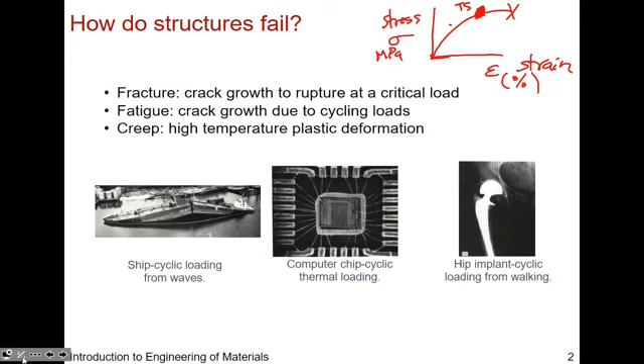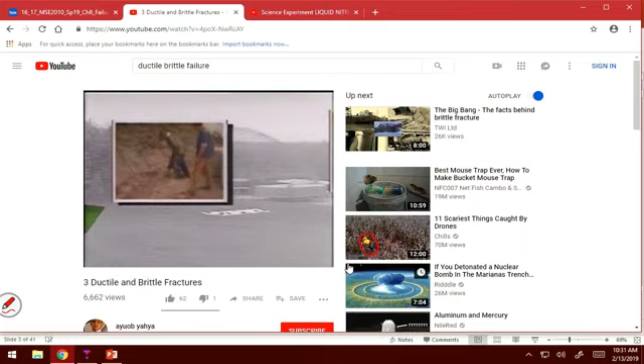There seems to be a synchronization issue with Box because my links are not showing up, but that's okay, they're quite retrievable. Before we go into ductile and brittle fracture, I'm going to post this onto your Carmen page under Chapter 8, Resources and Information. I just wanted to show you the mechanism from this very old, possibly late 80s, early 90s movie, but it gets the point across as to what's happening.

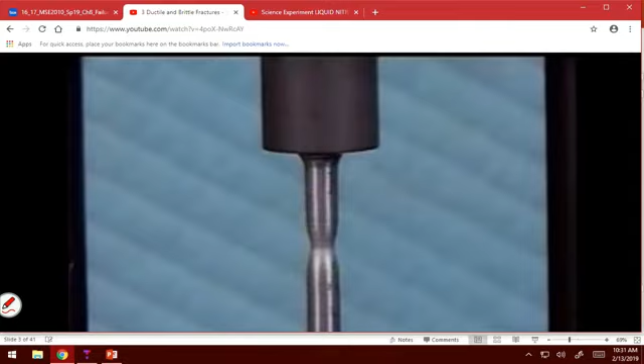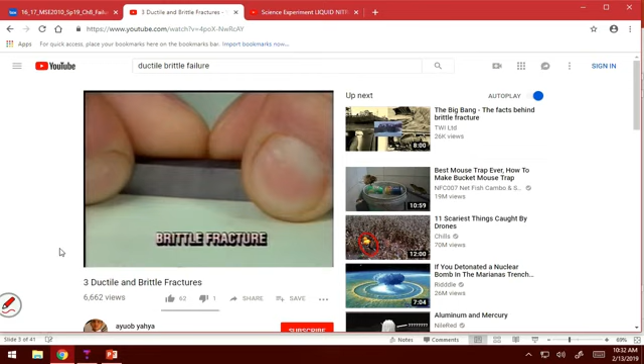So when materials fail in a ductile way or in a brittle way, you could see a load being applied in tension and it snaps. You see this typical cone shape, cup and cone type of breaking versus just cleavage and breaking. So here's brittle fracture, it just breaks off, right? There's no necking. You don't see the elongation and the narrowing of the area.

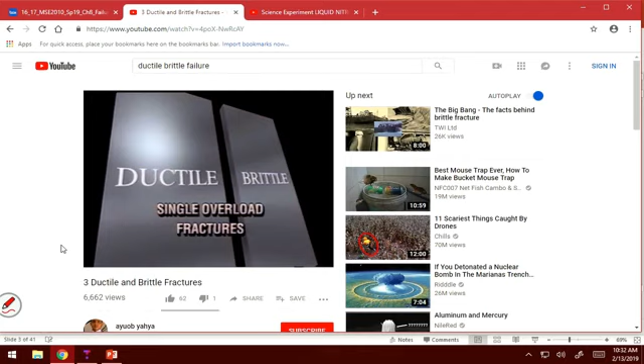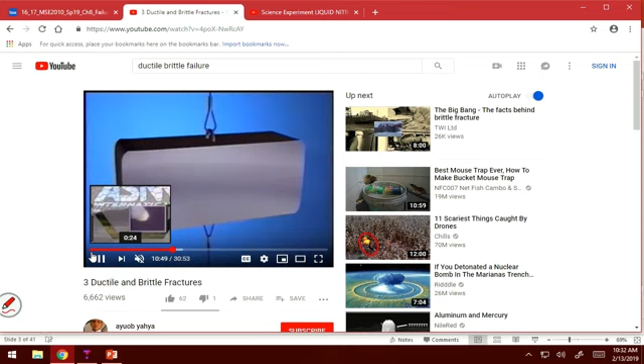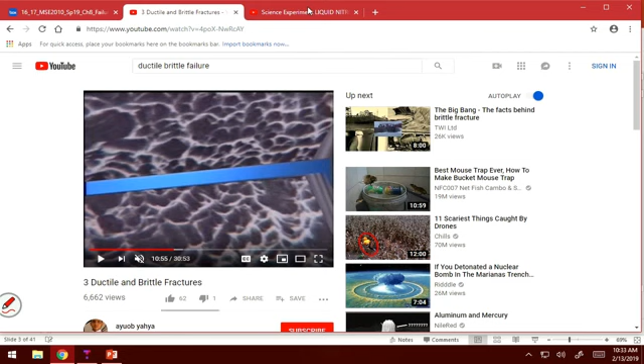You just see break. For fatigue, you can apply a load like this, and there are machines that do this for you: apply compressive and then tensile stress, and also rotate the bar. There are a lot of videos that show this, and this one is quite spectacular. They show micrographs of what happens when these things break, at what point and how. It's a very long video, so I'm going to skip to the point that's illustrative, where you can see these voids forming and then just breaking.

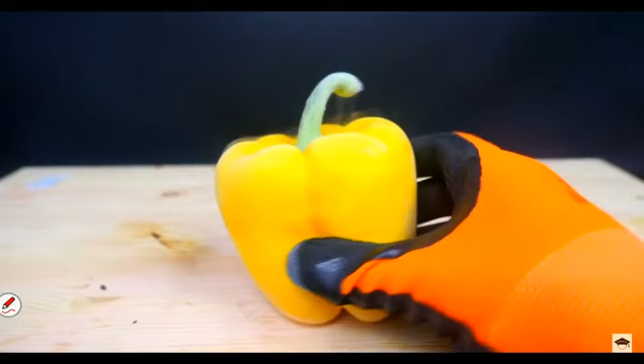Okay, so this is liquid nitrogen, very low temperature, negative 320 something Fahrenheit. Our cold days don't really compete with this. So what do you think is going to happen to this poor bell pepper? Let's treat it like a polymer, as if it was once fibrous, a thermoplastic fibrous polymer. Now it's been treated with liquid nitrogen. It's obviously very cold. What do you think is going to happen? It's going to shatter, brittle fracture.

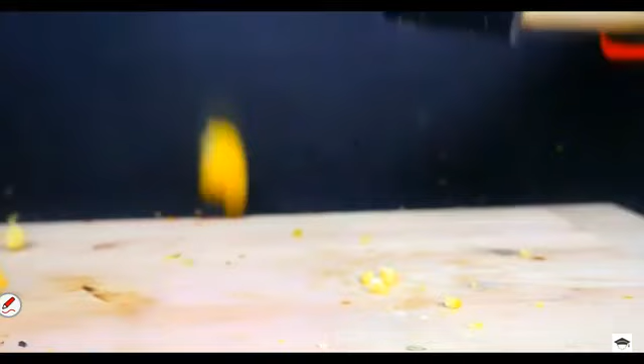Oh dear. It is exactly what you think it is. Okay, so that's how a polymer behaves. There's another example of polymers.

Okay, now let's go to a lock. If you ever forget the keys to your lock, this is one way of dealing with the situation. Some steel. Clearly it's a lock because you can put a key in it. Now it's soaked in liquid nitrogen.

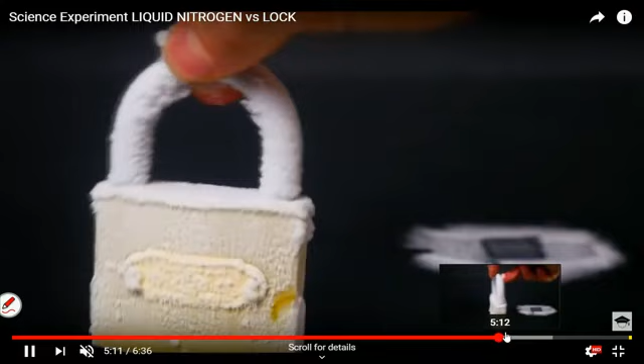What do you think is going to happen to this, now that you've decreased the temperature to something really low? It's brittle, the fracture is going to be... Oh, they did it to two locks. I've forgotten about this, well, it's true. Always gather statistics, right? You need to be able to repeat your experiment. You can see it's quite a small hammer.

Oh okay, so the piece didn't actually shatter that much, but I think it's also because, well yeah, you can see there's just complete cleavage, right? It is a clean break. There is no ductile breakage there. So you don't see any ductile breaking, which means no necking, no elongation and narrowing and then breaking, you just see the breaking. So it's a brittle break, a brittle fracture.

There's a lot of these types of fantastic videos online. Okay, so that's it. Now, if you look at the material after fracture happens, you can tell almost immediately how the material broke. One, as I mentioned, is cup and cone, due to necking. Brittle is just a clean break. You can also kind of see just by eye the shimmeriness of a brittle fracture versus a kind of dull surface for a ductile fracture.

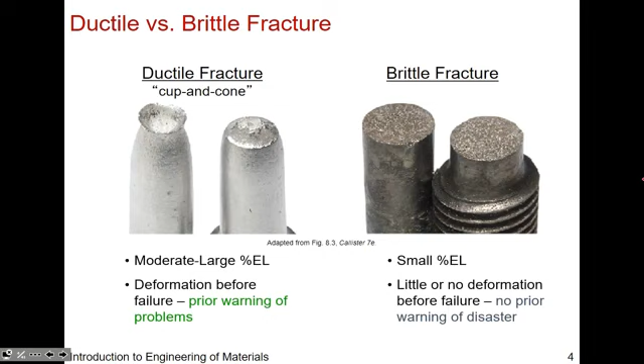As I said, there's some elongation, and if you notice elongation, if you have a monitor set up, or if you're servicing this material and bring it in to check on it, you can do X-ray microscopy, X-ray diffraction, and see there's some changes in the structure. You could probably just take this to an optical microscope, to be honest. You don't have to go down that far in resolution, but by examination you're going to see imminent failure. The problem with brittle fracture, of course, is that it happens very quickly, so you might not see this as you're inspecting a part.

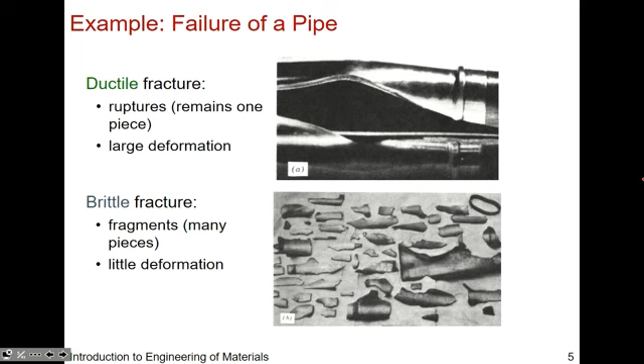So that's pretty dangerous when it comes to materials failure. Right, so we see here some more examples. Brittle fracture, it's in fragments, there's very little deformation, if any. Ductile, there's large deformation, you could see it coming. This is a good thing, it's better to catch a flaw before it ruptures, so there's some bit of warning there. There are also ways of testing materials.

If you just machine something, you want to see what kind of impact, what kind of toughness it has, the impact energy that it can absorb. You do these standard materials and mechanical engineering type tests called the Charpy impact test.

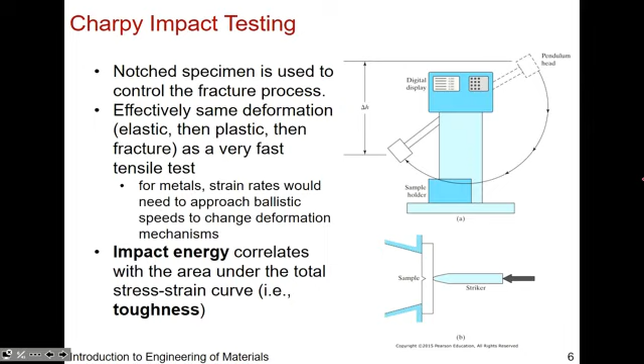You lift the weight and then drop it, and based on the MGH difference, the height and difference of how much this pendulum swings, you can back calculate how much energy has been absorbed. So you could talk about a material's toughness that way as well. As you recall, toughness is the area under your stress strain curve.

Professor Glenn Dane, who does this a lot, will come in and talk about these fun types of experiments on failure.

You can manipulate the stress strain curve of a material, or its mechanical properties, by either heat treating or alloying. We've already seen from the YouTube video what happens to metal when you drop the temperature: it goes through brittle fracture.

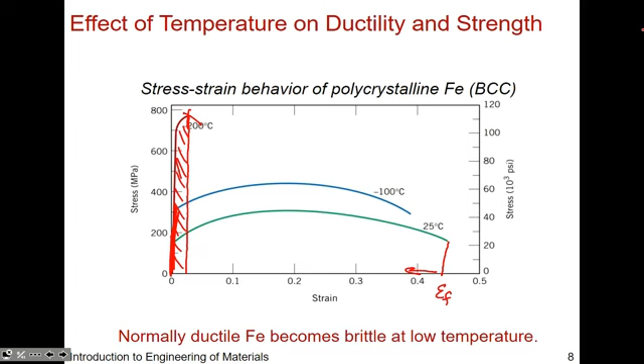We left off on this plot. So how do I improve the ductile to brittle transition temperature? What you want is to be operating above the transition, because you want your material to be ductile so that if there's going to be a rupture, you have some warning, some time.

You can add in, let's say, substitutional components. Here, for this particular steel, if you add in substitutional manganese, you can decrease the ductile to brittle transition temperature as you go from 0 to 0.5% to 1% to 2% manganese. Now your material is safe to operate at, I'd say, negative 25 C and above.

Now, safe is a highly nuanced term. If I'm just looking at this transition, it's the predictor: is it above or below this ductile brittle transition? Above, it's going to be ductile. Below, it's going to be brittle.

You can see that here: the impact energy is quite low below this transition temperature, where it's quite high above. It can absorb a lot of energy above this transition, so it can plastically deform and give you some sort of warning before rupture.

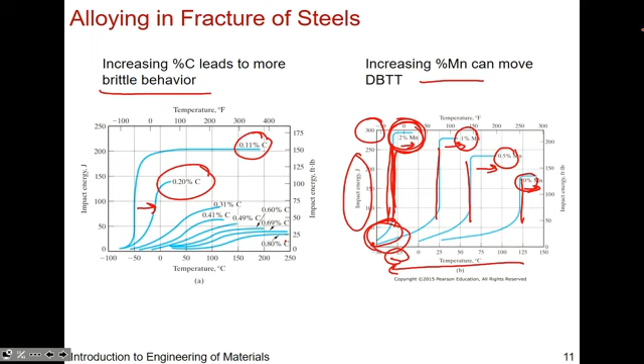As temperature increases, what was the second part of your question? The impact energy change, right? So it depends on the temperature, and by temperature you mean the ductile to brittle transition temperature, or DBTT. So yes, above that temperature for a certain composition of manganese in steel, it does change. Your impact energy is much higher in the ductile region than it is in the brittle region.

So we talked about fracture. Let's talk about failure and fatigue. A material can fail if it doesn't perform as it is designed to perform. So if you build a table and it breaks, it has failed, right? If you design a chair and you sit on it and it breaks, it has failed. There, you don't even need cyclic loading. It just failed, but there are also different mechanisms in which materials can fail.

So we talked about creep. If you stress your material at high temperatures, your material can fail. If there's a crack or a flaw, as is in any real material, this crack can propagate, so it can grow in length, and this growth is also accelerated as the crack gets longer. That can lead to failure by the mechanism of fracture.

And then you can also just wear out a material. That's fatigue, that's cyclic loading, right? Continuous compressive, tensile stress and torsion as well. You can definitely fatigue your material and it will fail that way, even if your load is well under the tensile strength of a material. So many ways a material can fail. Three out of the eleven points that are brought up in your book.

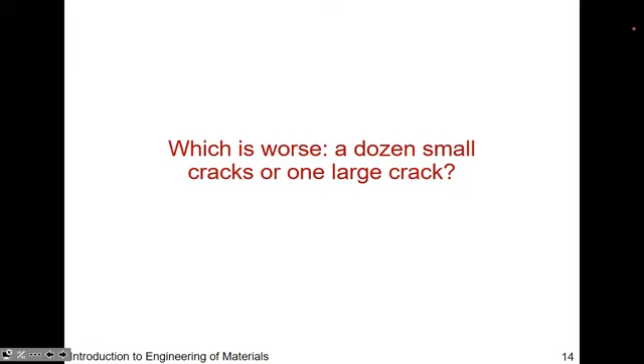So you would not want that. You might want to prefer a bunch of tiny cracks that are static, and at least in compressive strain, nothing will happen, right? Obviously, if there are a lot of tiny cracks and this material is going through wear and tear, in service, then those small cracks will also become a problem over time. But if you just take a snapshot and say this material has a bunch of tiny cracks versus one large one, in that particular situation, I would take the tiny cracks, because of what's called stress concentrators, okay?

We'll look at stress concentration and also fracture toughness of a material. Those are two different things, even though they both have the letter K as the representative notation. So let's talk about stress concentrator.

If you have a crack, the mathematical formalism on how to model a crack and how it propagates is with a sphere or a circle in this case. So in 2D here, XY, you see this crack represented as a circle. You can have just a nice round circular crack, or you can have a really extreme thin crack, more ovalish. That's the example you see on the right.

So then if you apply some stress, this sigma naught, how is the stress right at the tip of that crack going to be? As the name denotes, it's concentrated — it's a stress concentrator. So even though as an engineer you know the applied load, the stress that's right at that tip can be immensely higher than what you apply. The way you take a look at that is if you move this over here and take a look at this ratio, you could see, okay, what is the K? What is that ratio right at the tip? How much is the stress concentrated?

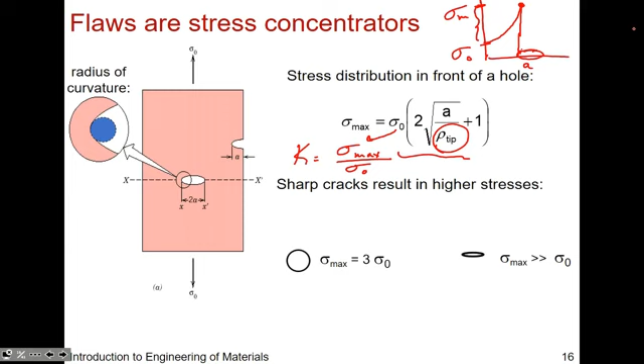You can do this analytically by going to Wolfram Alpha and showing it. You can see the applied stress versus what you experience for a crack. Let's say this is A. If you apply something here at the tip of the crack, if this is your internal crack, that's the oval there, you could see the stress right at the tip could be much higher. This could be 10x, 20x, much higher than what you applied.

So that's the stress intensity factor. This Y here I haven't talked about, mainly because it's geometric and also materials dependent. A lot of times we treat it as 1 for simplicity, because we really just want to look at: if I have some applied stress, some nominal stress, what is going to be my K? And that's based on the applied stress and also your crack dimension.

And the way we treat surface cracks versus internal cracks is very simple. For a surface crack, you just measure the length of your crack, that's A. This 1.1 here is materials dependent, okay? It could also just be 1.

Your internal crack, we treat that as 2 cracks. So if you just block off this part, this looks like this, right? We treat an internal crack like it's just 2 surface cracks. So your crack that's on the inside is 2 times the crack length, because we're treating it as 2 cracks. Whereas your surface crack is just that, that's how we define crack length. So internal is 2A, or if you're given the internal crack length, then A is divided by 2. Sorry, your length is 2A, so if you're given a length, you have to divide by 2 to get your crack length. So here, this would be the L that I'm referring to. L is 2A, or L divided by 2 is A. That's how we normalize surface cracks to internal cracks.

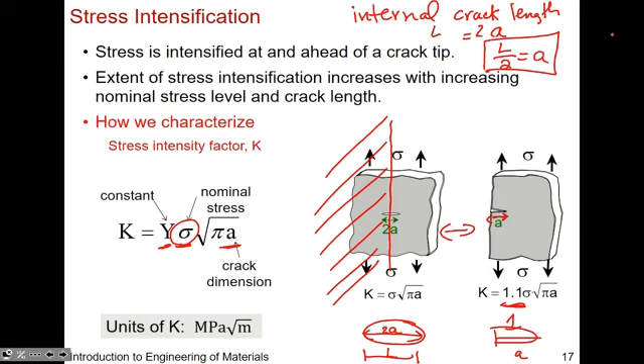Right. So the condition: cracks are stable and will not propagate if it's below Kc.

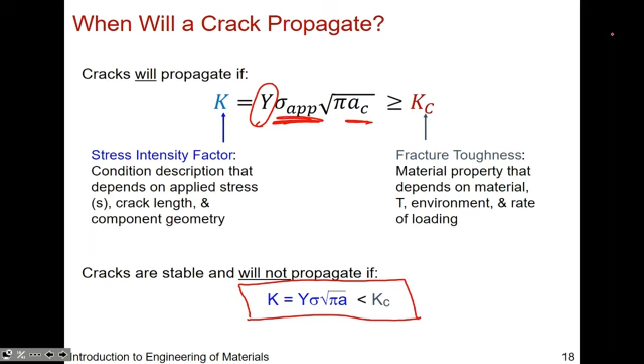I had a question about the units of K. Why did we choose to have the square root instead of just squaring it all? That's a great question for our professional ancestors. I say that in all honesty, it's historic. Square root of meters is not something that our brains process well, because we process units like meters well. Why? I don't have a really good answer for you, so we're in the same boat there. But I agree, you can also square it, same thing, but then you get megapascal squared.

So we want to know: will the material fracture or not fracture? If you have an applied stress and you know your crack flaw because you've done X-ray diffraction, you've looked at it under a microscope. If your crack is big enough, you could see it under an optical microscope. If it's not big enough, you get into a scanning electron microscope. These are the instruments we use for failure analysis.

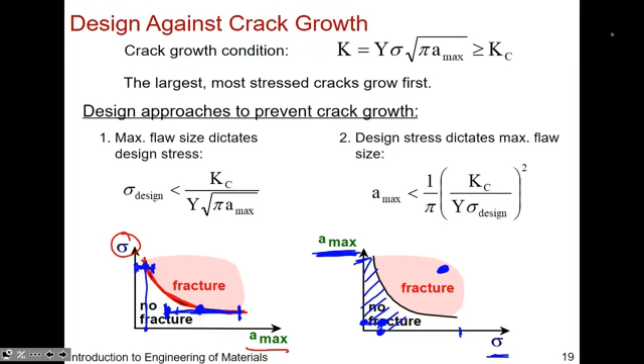Okay, so let's do an example. Let me get this on Top Hat.

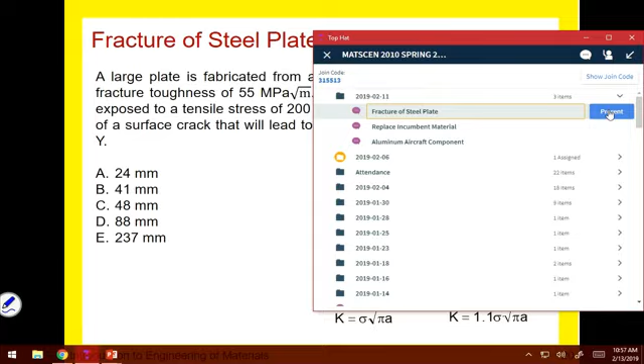So if you have a large plate that's a steel alloy, and it has a plane strain fracture toughness—so this is your K1C. Your book goes into nuance details about what a plane strain fracture toughness is, but it has to do with the dimension of the material. If during service the plate is exposed to tensile stress, so that's your applied stress of 200 megapascal, determine the minimum length of a surface crack that will lead to fracture. So note this is a surface crack, and assume that Y is 1. This is the fracture toughness of a material, this is the applied load.

What do you think is going to happen, in terms of how long does this crack have to be for it to lead to fracture? Let me go back to the question in case you need that, although I don't think I showed the equation. Or also, there's A through E.

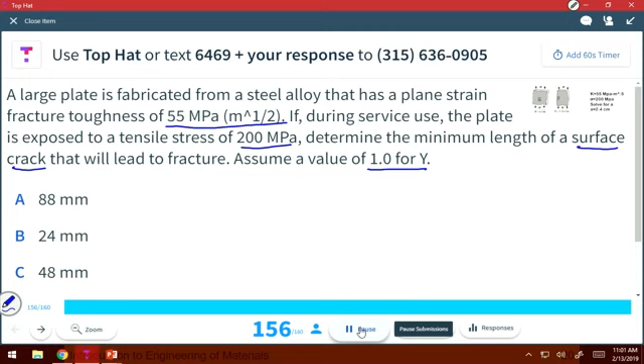It is a straightforward calculation, but the emphasis is on whether or not it's an internal crack or a surface crack, right? So that was sort of given. So you know your fracture toughness is K1C, right? It's uniaxial, that's what the 1 is for, critical crack. Okay, so it's 55 megapascal square root meters. So then you have to calculate what A is, okay? And so there you convert the units of meters to millimeters. It's 24 millimeters. So if you switch this equation around, you have your K1C over square root pi, sigma, all of that squared, because your A was in the square root before. Plug in your fracture toughness, your applied stress of 200 megapascal, and you get that. Okay.

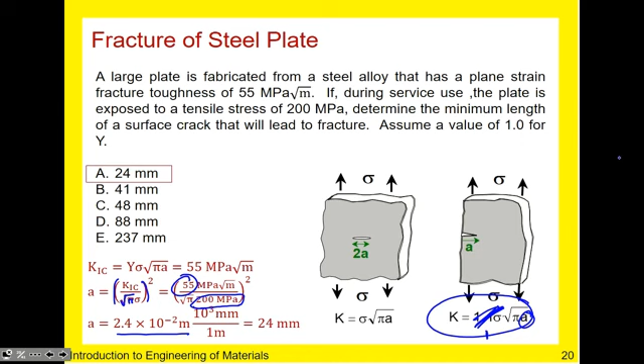All right, what about if your material now is replaced with a material with a higher fracture toughness? What can you say about the material? So I'll open that up.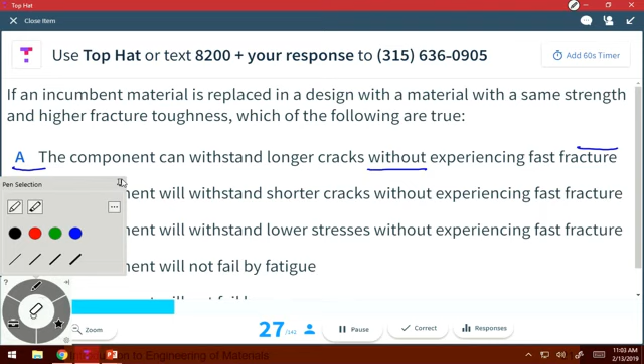Disregard the blue markers. Will the component withstand longer cracks without experiencing fast fracture, shorter cracks? Or will the component withstand lower stresses without fast fracture? Will the material not fail by fatigue now that you have higher fracture toughness? Or will the component not fail by creep?

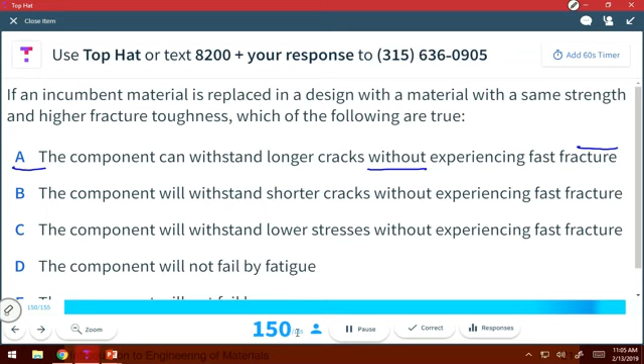Okay, let's see. Wow, fabulous. Right, so anybody care to share, since 90% of you got it correct?

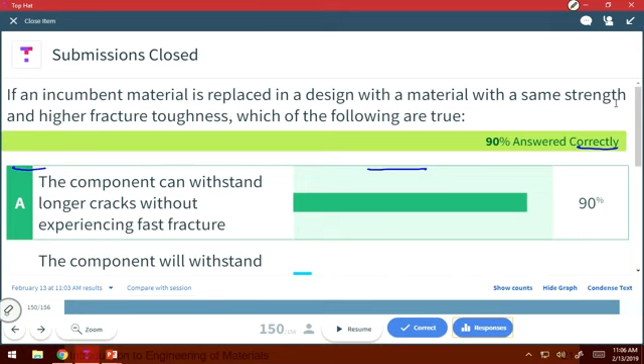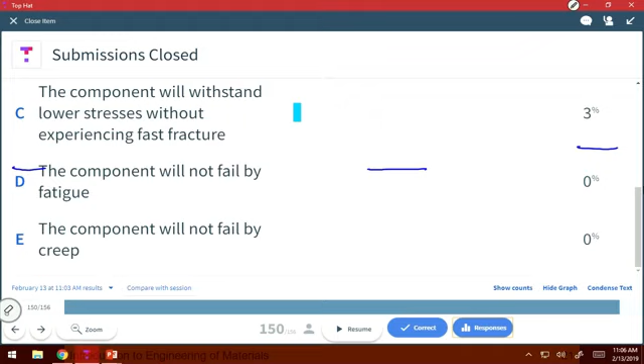Certainly, right, fatigue - we don't know how many times it's been cycled, that's irrelevant or insufficient information. Creep is temperature dependent and also static load over time, irrelevant, insufficient evidence as well. So, right, we're talking about crack length, and of course, higher fracture toughness is obviously directly proportional to A, so absolutely. Okay.

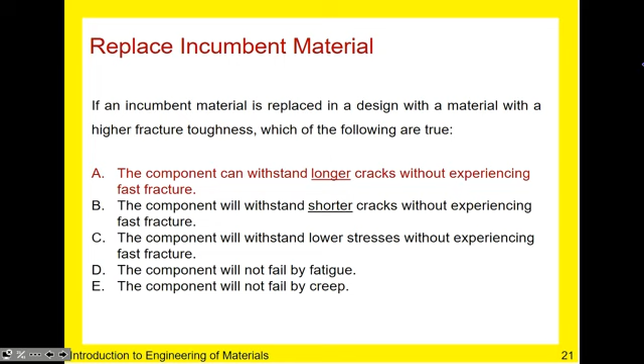This is manipulation of the equation again, so I'll leave that to you to practice.

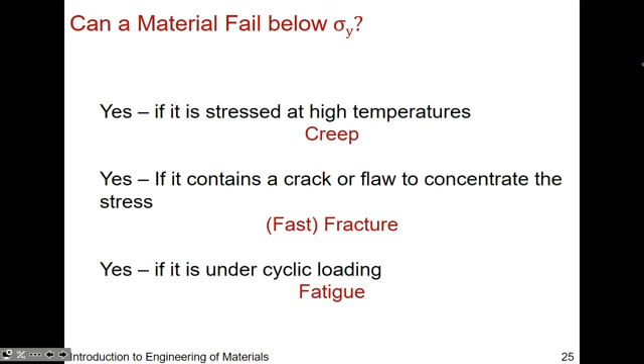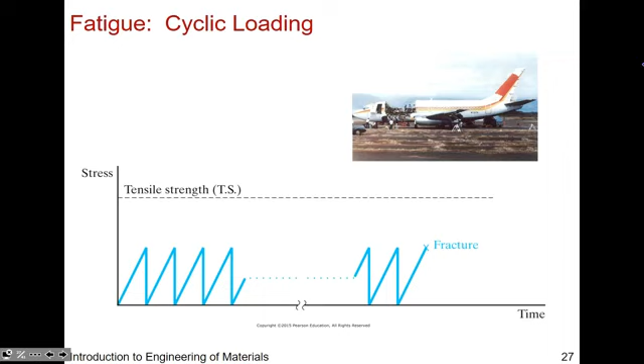Right, now let's talk about cyclic loading. If you operate well below the tensile strength of a material, if given enough time and number of cycles, your material can fatigue and fail. Okay, and here you see it can also lead to fracture.

And so the way we look at this fatigue, and the way we calculate fatigue, is we look at the mean stress. So if you're applying your sigma, it could be in tension, it could be in compression. If we take the average of that, so we add the two together and divide by 2, that's the mean, right, that's the average. Then we can also take a look at what's called the stress amplitude, and that's the difference between your max and your min divided by 2. So that's noted in the materials community as S, not sigma, S.

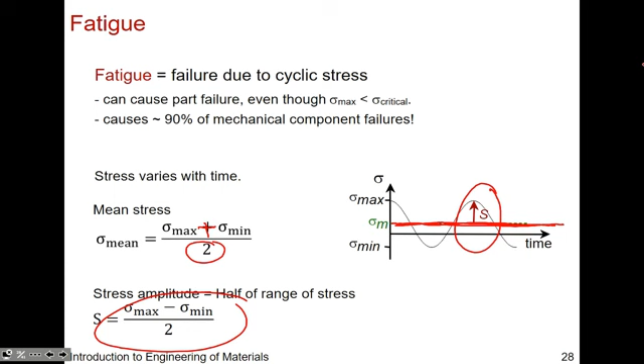Okay, so it would look something like this. If you take a look, if you plot the applied stress, S, and then the number of cycles to failure, you could see that if you apply very high stress, close to your tensile strength, you're not going to last very long - here it's 100 cycles. The material, however it's being used in service, is not going to last very long. If you want it to last much longer, you can reduce the applied stress, and under cyclic loading you could see here, you know, 10 to the 5th, 10 to the 6th.

There's a limit in which you can safely say the material will probably not fail, or have a much longer cycle life to failure, and that's the fatigue strength or endurance limit. So if you operate below this threshold for a particular material with a given tensile strength, most likely it will not fail in your lifetime or in the number of cycles you can track. That's extremely generous and theoretical.

Most of the time, the error bars are quite large. So I can safely say if you apply this stress to your material, I can probably guarantee a lifetime of 10,000 cycles. If you apply this load, your error bar is like this: it could fail at 10,000 cycles, or it could fail way out here, or in some infinite time it might not fail at all, it could be really long. So I'd be very cautious about operating in this regime. Even though this is the endurance limit, the error bars are quite large in this region, so take it with a grain of salt.

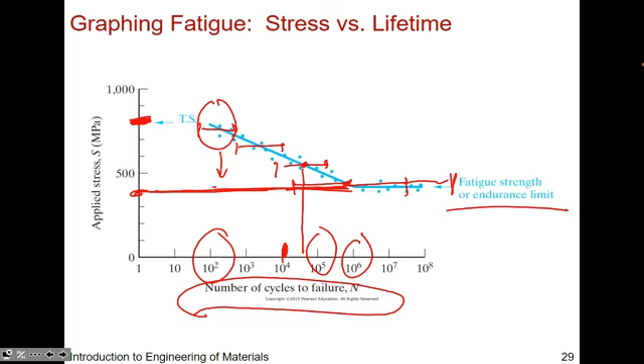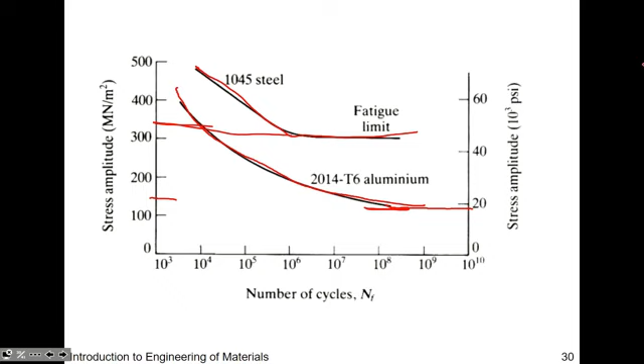You can plot the same curve for different materials. Here's steel - it has this more elbow-type behavior. For aluminum, there's no really definite point where the endurance limit begins. Maybe if you elongate it, this is your endurance limit, versus up here for steel. So not all materials behave the same, and they can behave quite differently - that's something to keep in mind.

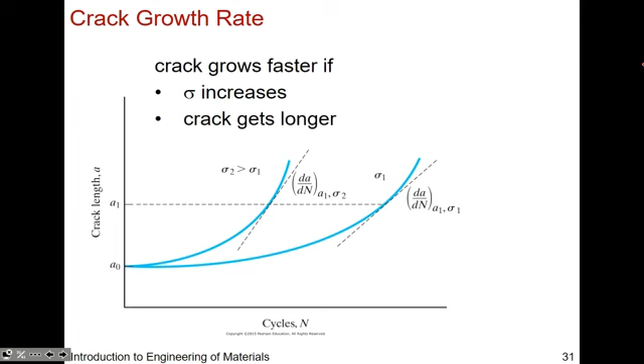As I mentioned, crack growth can accelerate. So your small crack, if it becomes longer, it's not a linear elongation - it's not 2x and 3x. It could be 1x, 2x, and then exponentially grow, as you can see here. That's something to keep in mind.

Let me talk about the ways we can strengthen material and lengthen its lifetime. There's carburizing, as in the example of diffusion we've talked about. You can carburize the layer so that it's strong right at the surface, and it protects everything else in the bulk.

There's a mechanism called shot peening, where you accelerate something like a stainless steel ball at your material, deforming it before it can deform itself. That's one way. There's also laser shot peening - it's cool, you basically have a high power laser and do the same thing, applying the same amount of stress but with a laser source instead of a stainless steel ball bearing. It's very cool and actually originated up the street in Worthington, so it's very revolutionary in terms of manufacturing technology.

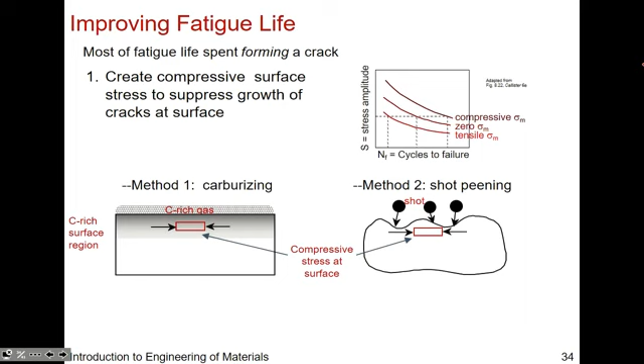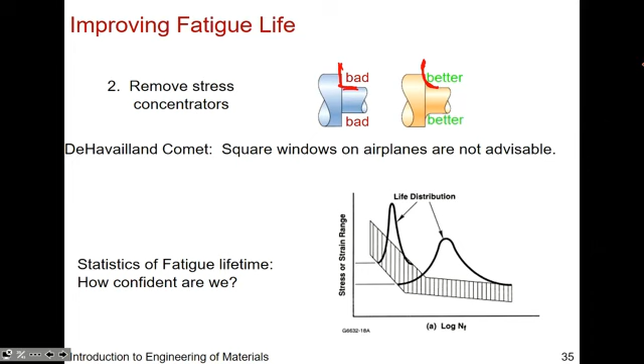The takeaway from these slides is sharp corners are stress concentrators and not advisable. If you want to decrease the stress concentration, you can change the curvature - this is much better. If you're designing a component, this is something you would want to keep in mind.

You can take a look at fracture toughness databases - these are called Ashby plots. You can look at fracture toughness versus strength of a material and see what material is strong and can also absorb a lot of energy. Those are typically metals - all these examples here have very high fracture toughness, whereas polymers are quite low but they are ductile. So it's always a trade-off in terms of mechanical properties.